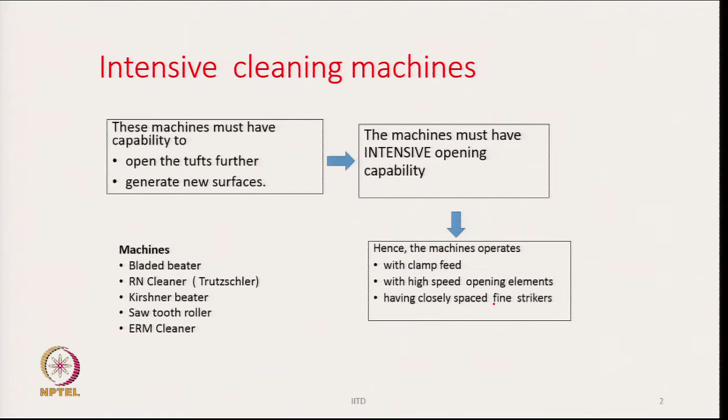So, these are the common features of all these machines, and the name of the machines are listed. If you look at these names, there are quite a few machines which fall in this category. These are the commercial names of the machines, like RN cleaners, sawtooth rollers, or ERM cleaners. We will discuss some of these machines now.

The general construction features of these machines are that there is a cylindrical chamber as shown in this diagram, which will house the cleaning equipment. The top part is covered by a plate, and the bottom part of the machine holds a series of grid bars or maybe a perforated or slotted sheet, as the case may be. So, it is a cylindrical chamber which is going to house the cleaning equipment, whatever is the form of it, and the bottom part is having either grid bars or a perforated or slotted sheet.

The space below the grid bars is enclosed from all sides to create a dead air chamber for the collection of trash particles which will settle here. So, the trash particles will fall down and will settle below the grid bars.

The beater is mounted centrally on side stands. There is a tuft entry, like here it is shown on the left hand side, and there has to be a tuft exit also. So, this is the typical constructional feature of the machine.

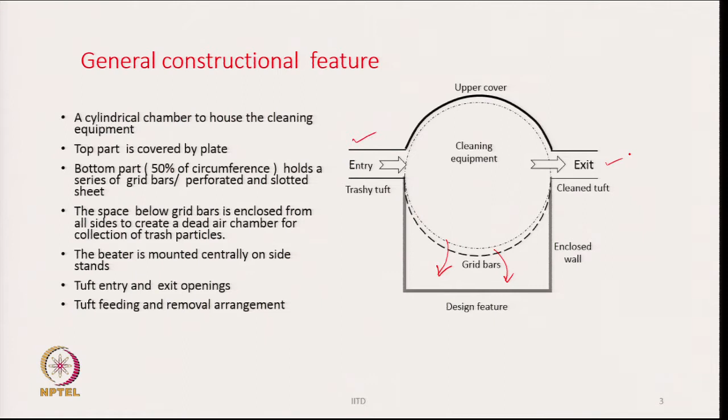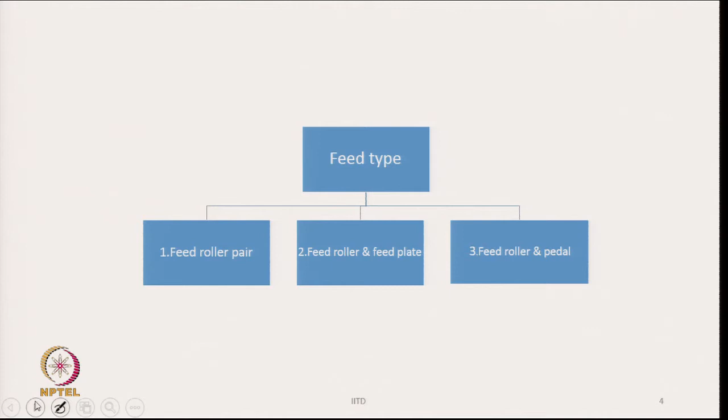Now, the most important part of this category of machines is the type of feed, that is, how do we feed the tufts. There are three types which is normally followed by the machine manufacturers. One is feed roller pair, that we use a pair of feed rollers, or we use a feed roller and a feed plate, or the third one is a feed roller and pedal, sometimes known as pedal and pedal roller also.

So, these three types are there. I will try to understand what are the differences between these three types, and a little description about the three types of feeding devices which are used. So, the first one is a pair of feed rollers. Now, this pair of feed rollers, as shown in the diagram, consists of a conveyor followed by a pair of fluted rollers.

So, this is the conveyor here, and these two are the feed rollers. So, a conveyor carries the tufts and feeds the tuft in between the two feed rollers that we have. The forwarding motion of the feed roller is best, since both the top and the bottom rollers rotate.

Therefore, both the rollers are positively driven and hence they can guide the tufts in an easy manner. The clamping distance is maximum, that is a disadvantage.

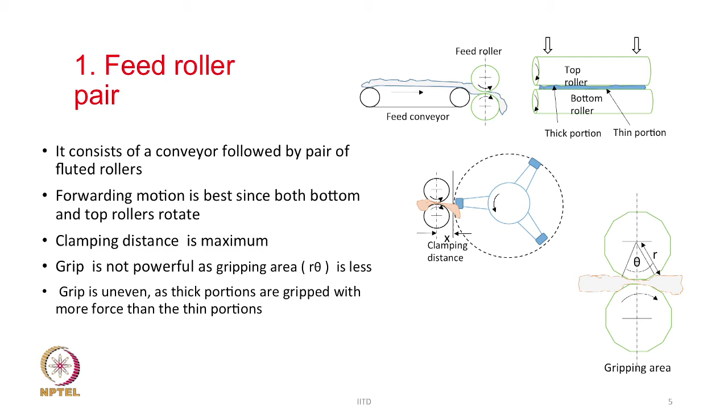The sheet being fed is basically an agglomerate of tufts in the form of a sheet which we are feeding to the machine. So there could be some unevenness across the sheet, and if the unevenness is there, then the thicker region will be experiencing more force when gripped between the two rollers, whereas the thinner regions will experience less force.

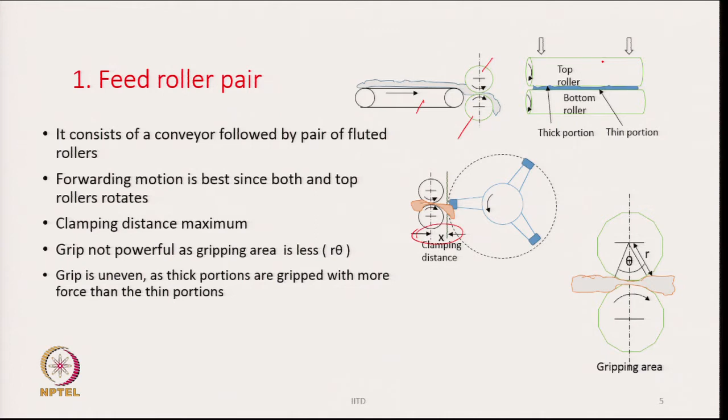So when this cross section is acted on by a beater, what happens? From the thin regions the tufts will be able to slip. There is a possibility of slippage of tufts from thin regions, and therefore these tufts may not be opened properly, whereas the tufts in the thick regions, because they are more powerfully gripped, will receive the blow from the beater blades and they will open out.

So as far as the thick region is concerned, there is no problem, but in the thin regions there is a chance of slippage of the tufts, and therefore they may not be opened properly. And if we can't open them properly, the cleaning ability of the machine will go down.

From there we move to the next type of feed arrangement, which consists of a feed plate and feed roller combination. So there is a plate and a roller, but this time there is a single roller only. The feed plate is a stationary plate only. So look at the cross section of the plate as shown in the lower diagram.

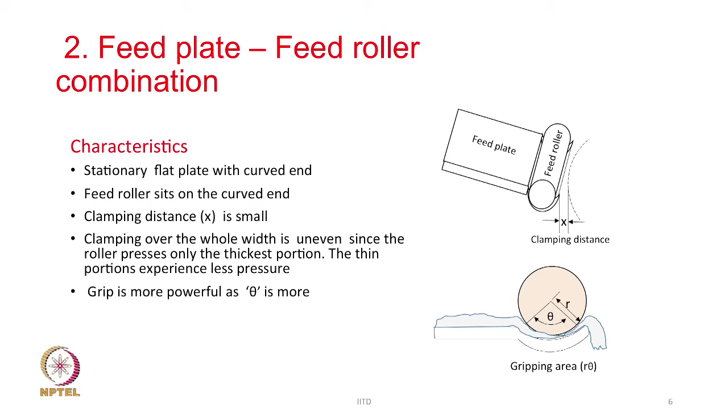From there we go to the third type of feed arrangement, where there is a pedal and a pedal roller. This is a little different from the previous one. It is like if we take the feed plate and slice it into many parts, then we get this kind of arrangement. We call it pedal and pedal roller.

Each pedal, shown in the top diagram, is basically a lever with a long tail and a fulcrum. So it is a kind of lever with a fulcrum.

The tail end of the pedals are connected to a spring, or sometimes dead weights can be hung from the tail part of these pedal levers. The forward end has a curvature matching the curvature of the feed roller, and the feed roller will sit on it.

There is a little gap maintained between this pedal and the pedal roller, because we have to accommodate the sheet of tufts there. The mat of fibers in between the pedal and the pedal roller remains under pressure, because the roller is also under pressure.

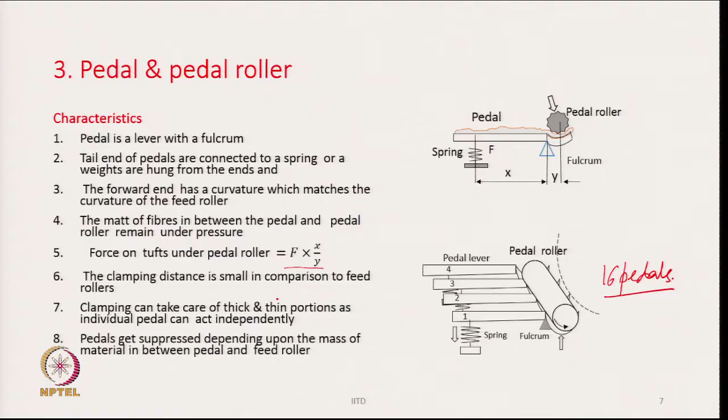How much the pedals will be depressed all depends upon the mass of material or thickness of material in between the pedal and the pedal roller. So these are the three different types of feed arrangement for the intensive cleaning units that we use.

If we compare the three different types of feed, in the case of two interacting clamping rollers, the forwarding motion is best, because both rollers are rotating and positively driven. Clamping distance is maximum, which is a disadvantage, and grip is not powerful, which is also a disadvantage for this type of device.

For feed roller and feed plate, forwarding motion is only by one roller. The plate is stationary, so forwarding motion is not so good. Clamping distance can be reduced, which is an advantage, but clamping over the whole width is poor, since the roller pressures only the thickest part and the thin part does not receive much pressure.

The grip is more powerful due to being spread over a curved surface or region, hence the grip is better. For feed roller and pedals, forwarding motion is by only one roller, so forwarding motion is not so good. Here also the pedals are stationary, they do not move. Clamping distance is minimum, and clamping can take care of thick and thin portions, which is an advantage over the feed roller and feed plate arrangement.

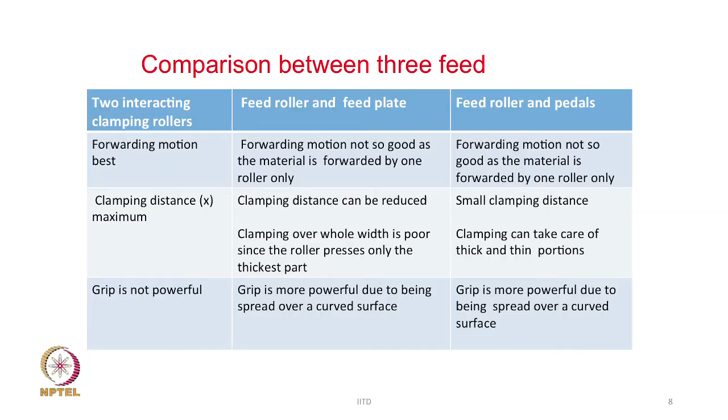There is a central shaft at the center point, with three projecting out arms at 120 degrees to each other. At the top of the arm, steel blades are fixed.

At the top of the arm, steel blades are fixed, because these blades will be coming into contact with the tufts, so they have to be very strong. The tufts are fed by a feed lattice to the beater chamber. There is a compression roller, and the sheet is being fed by a pair of feed rollers.

So, I am feeding this to the chamber where the beater exists, and the beater rotates at a certain speed. The tufts, as they are fed, the blades will impart a very strong blow on the tufts held by the feed roller pair. So, material is being fed continuously, and the beater blades are coming towards it and imparting a very strong blow on them.

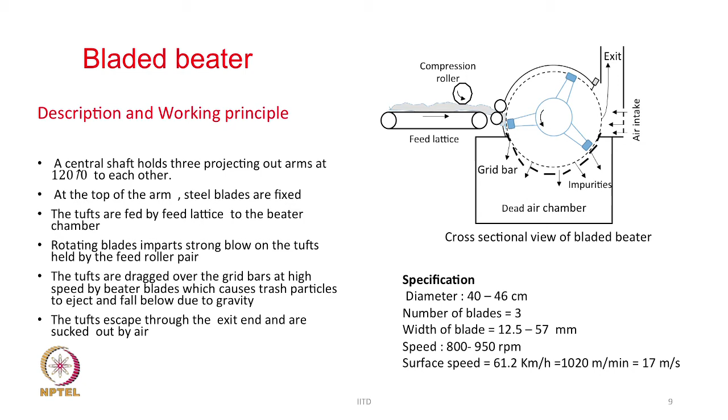So, this is how the bladed beater is going to act, and similar types of designs are there, where within the chamber, if the beater is replaced by another type of beater, then it will also be a very intensive cleaning unit. That is what has been done by the machine manufacturer. The overall structure remains the same; we just change the design of the beating blades.

All right. So, let us go from here to some detailed specifications of the machine given here. These are typical values; it may vary from manufacturer to manufacturer, but just to give you some idea, I have given you some typical values.

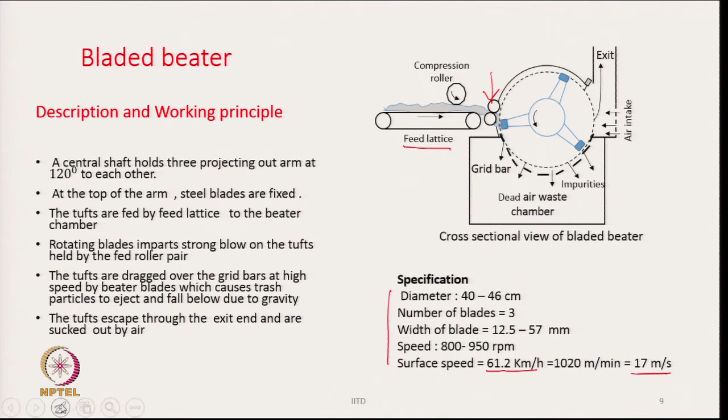The feed rate is changed to alter the intensity of the beating action. So, if I change the feed rate, the distance between these lines can be made shorter or longer. That way the intensity can be changed by changing the feed rate, or by keeping the feed rate constant and changing the speed of the beater instead, which will also change the intensity of the opening action. So both ways it can be changed. Changing the feed rate will affect the productivity, which we have to keep in mind.

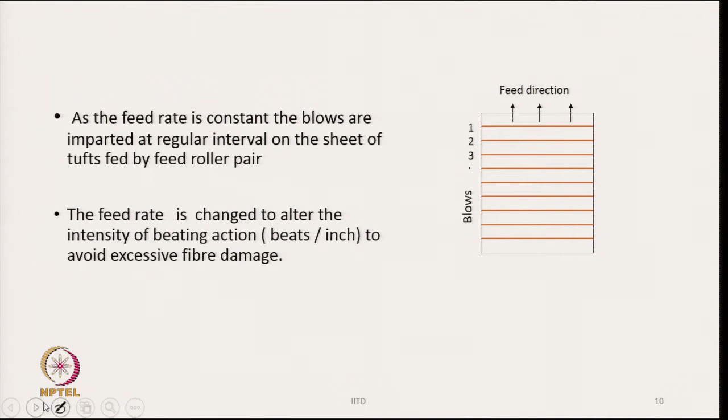So, with this we now go to another important aspect of the beater. We need to discuss it a little more thoroughly: the grid bars that we have seen below the machine. What we have seen is that the bottom part of the machine will always have some kind of grid bars, under casing, or some kind of blades. Different machine manufacturers have different types of designs, and different combinations are possible. The grid bars are basically polygonal bars, or they could be blades as elements with edges.

Or it could be a perforated and slotted sheet. Different types of designs have been made by different machine manufacturers, and they are used in different locations. Now, the grid bar normally covers at least 1/4 to sometimes 3/4 of the machine. So, we have seen that in the case of the step cleaner, around 25% of the circumference is covered by grid bars.

Some machines can have up to 50% coverage by the grid bars, some machines up to 75%. So different designs have different extents of cover by the grid bars.

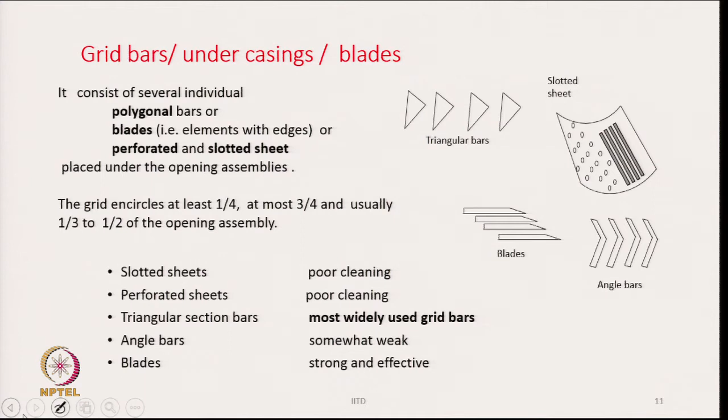Now, with slotted sheets, the cleaning is relatively poor. Aggressiveness on the tufts is less in comparison to triangular bars. Perforated sheets also give poor cleaning.

Triangular section bars are mostly used. Grid bars are these triangular bars. They are quite aggressive on the tufts, and we can change this aggressiveness by adjusting the exact position of the triangular bars with respect to the line of action of the beater. We can change the angle, making the triangular bars very aggressive on the tufts, or less aggressive, as the case may be.

The angle bars are somewhat weak, and the blades are very strong and effective. In some cases we use the blades also. In some type of design we simply use blades followed by a suction. Anyway, so these are the different types of grid bars, under casing or blades which are used.

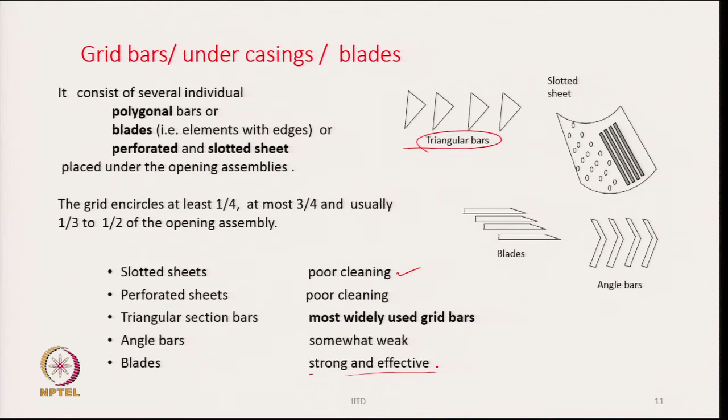Now we need to discuss the effect of grid bars. The grid bars have a major influence on the cleaning effect. Their job is mainly to clean, they cannot open the tufts. Their job is to clean the tufts, because the tufts will be hurled over the grid bars, and the kind of action the tufts or trash particles receive depends upon the geometry of the grid bars and the way they are positioned.

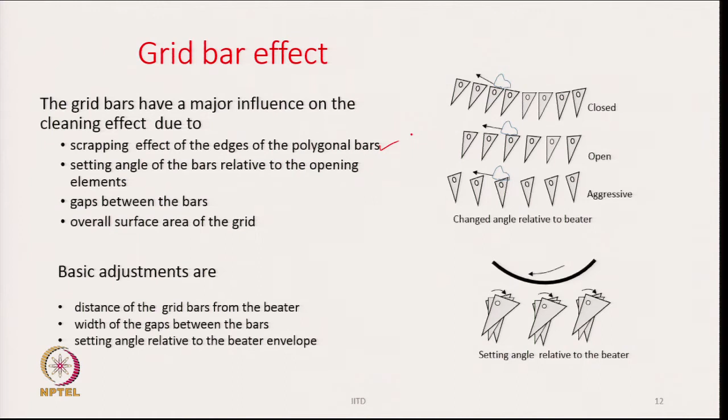So the cleaning effect is affected by the scraping effect of the edges of the polygonal bar. The edges of this polygonal bar have a scraping effect that depends upon them. The setting angle of the bar relative to the opening elements also can affect the degree of cleaning action. The gaps between the bars will also affect the extent of cleaning and waste generation, and the overall surface area of the grids, that is the surface area of the machine covered by these grid bars. So in many ways these bars will affect the cleaning potential of the machine.

Basic adjustments are distance of the grid bars from the beater. That is the first important setting, the distance of the grid bars from the line of action of the beater blades. Width of the gaps between the bars: more opening means more trash, but more loss of fibers as well. Less opening means less trash, but less waste as well. Setting angle relative to the beater envelope will decide the aggressiveness of the edges of the grid bars. So these are the typical adjustment areas of the grid bars.

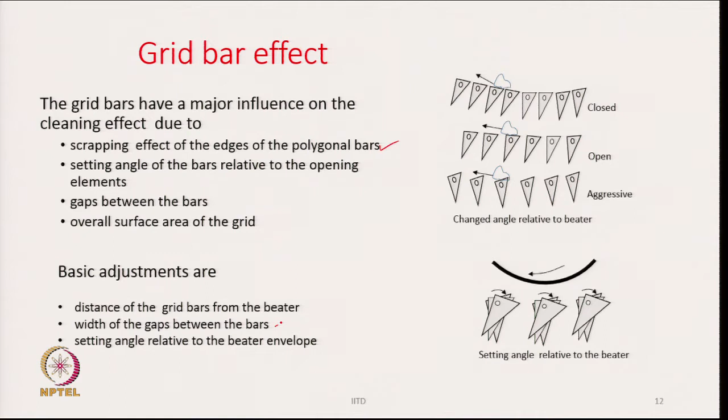With that, we have discussed the bladed beater part, the role of grid bars, the construction features of the beater, and the type of feed and their relative advantages and disadvantages. Now we are coming to another type of beater known as the Kirshner beater.

As I said, the construction features are more or less similar. The only difference is that in the beater chamber, the 3-bladed beater is now displaced by another beater with 3 arms. But now, the blade top surface is filled with rows of needles as shown here. So it is no more a rectangular strong bar, but now we have pins or spikes on it. That is the difference.

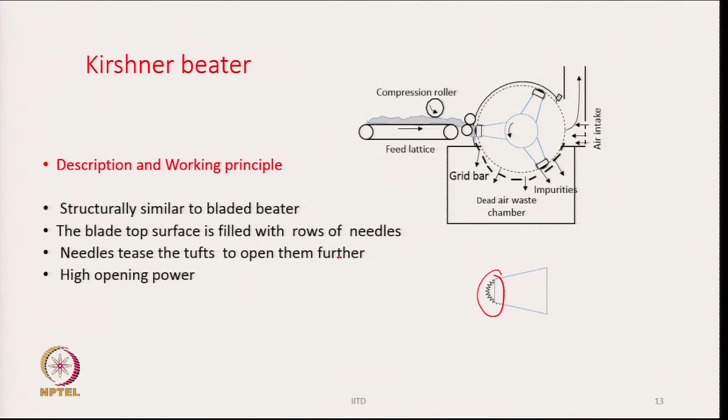And what is the advantage we get out of it? Because these needles or pins can tease the tufts, we are able to open them further. When the tuft size has reduced a lot, the bladed beater will not be able to open them further. So we need a very aggressive action on the tuft now, but that aggressive action does not mean that having a similar type of bladed beater and running it at higher speed is going to be effective.

To open the tufts further, we have to tease them out. So we have to have a means through which we can really tease the tufts with the help of needles. This beater has needles on the surface of the blade, and therefore it can open the tufts further. So it has a very high opening ability in comparison to the bladed beater. The rest remains the same, it also runs at quite high speed.

After teasing, the tufts will be thrown against the grid bars at high speed. So a lot of particles which are liberated because of this teasing action will be thrown due to very high centrifugal force, and many of them will pass through the openings of the grid bars.

So, the cleaning mechanism is exactly the same. We are feeding in a very similar manner, and we remove the tuft from the machine also with the help of pneumatic means.

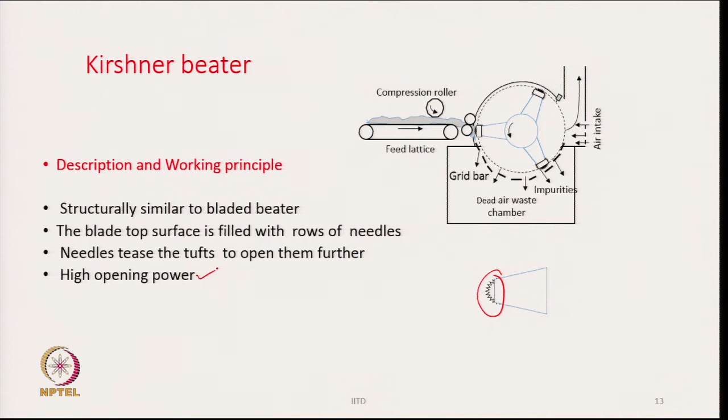The other type of cleaner is known as an air jet cleaner. The name itself implies that we take the help of a jet of air to clean. This particular cleaner has no opening ability because there is no opening device. It can only clean, meaning this machine must follow a machine where we have already opened the tufts and generated or liberated a lot of trash particles. That is what is important, but let us look at the design feature of the machine.

The diagram is shown. There is a tapering duct with a certain turn or bend. You see this is the duct as shown here, and it is gradually tapering, and then there is a sudden bend, more than 90 degrees. Then there exists a separation edge near the bend, as shown here.

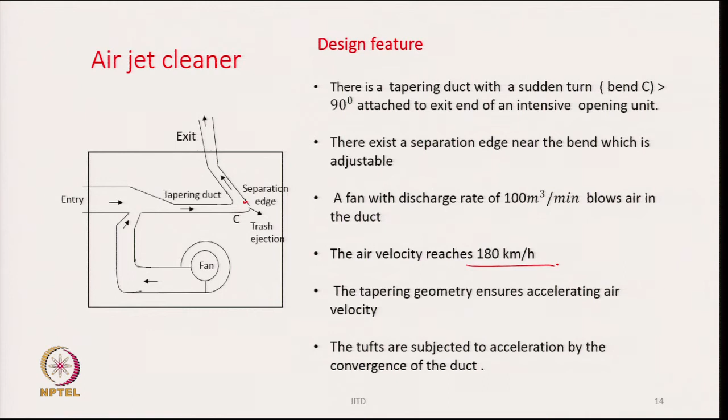By the time they reach point C, there is a sudden turn. And what happens because of this? We will now see this in the diagram.

The trash particles, we all know, are generally heavier than the flocks. Trash particles, density wise, are much heavier. Their density is more than the density of the flocks. Flocks are basically agglomerates of fibers. Now, cotton tufts have less momentum than the trash particles.

This is what is going to happen. So, cotton will move at the speed of air. At the bend C, the centrifugal force experienced by a tuft or trash is given by the formula Cf equal to m v square by r. That is the type of force which will be acting on them.

The specific volume of tufts being greater than the trash particles, tufts will follow the bend and move along with the air. So, tufts can easily follow the bend as shown in the diagram, because their specific volume is more. The specific volume is volume per unit weight. Per unit weight, the volume of the tufts is more, but per unit weight, the volume of the trash is less.

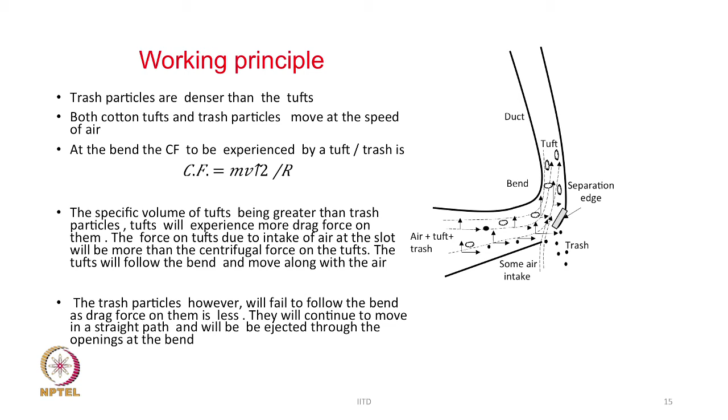So, in the duct, air plus tuft plus trash, all of them are moving together. The tuft will be able to follow the bend, whereas the trash particles will not be able to do it, and therefore, they will escape through this opening, and then we have a collecting system over here, where the trash particle will be collected. So, this is how you can also separate out the trash particles from the tufts.

Now we go to another type of design which is most recent, and we will discuss about them. These are known as cleaners with multiple Licker-in type rollers.

Now what is Licker-in? You will learn about them when you go through the carding machine, as we have such kind of device there. Licker-in is basically a roller with saw type teeth on its surface, like a cylinder or drum whose surface is filled with large numbers of teeth designed like a saw. So they are known as Licker-in, and hence we say these are cleaners with Licker-in type rollers.

These consist of a feed lattice shown in the diagram, and 3 to 4 cylinders filled with needles, sawtooth and pin type teeth arranged in a line. In this diagram we show you 3 cylinders, but we can have at the most 4. So it is a series of cylinders working one after the other, having sawtooth or needles or pins on their surface, all working together.

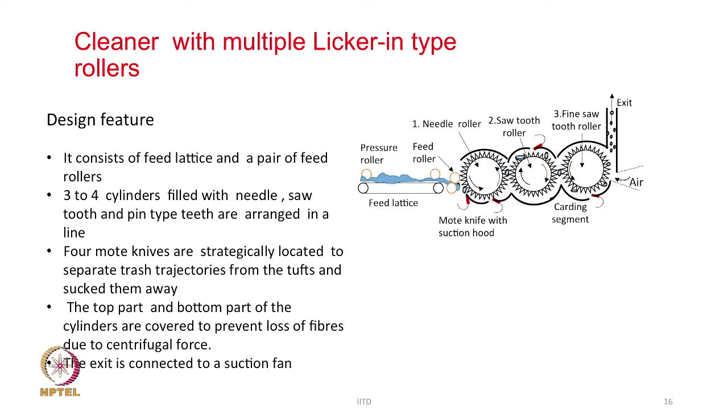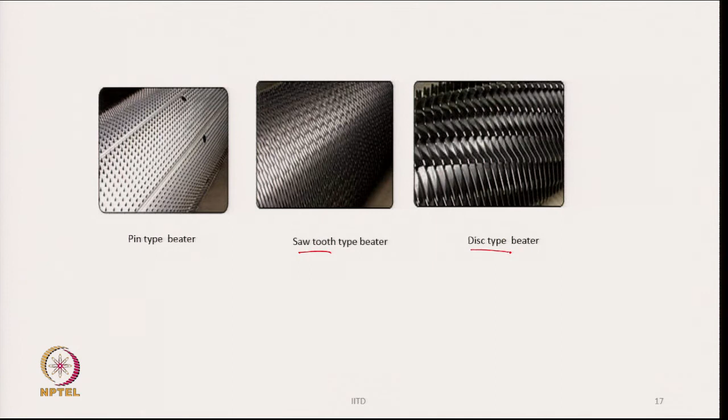The typical roller surfaces are shown here. You see pin type of surface, the sawtooth type of beater, and a beater with disc type of teeth on it. So different types of designs are there: pins, sawtooth, disc type, depending upon the nature and opening ability and kind of cleaning that we need. We can choose the type of beater or roller that we need in a given situation.

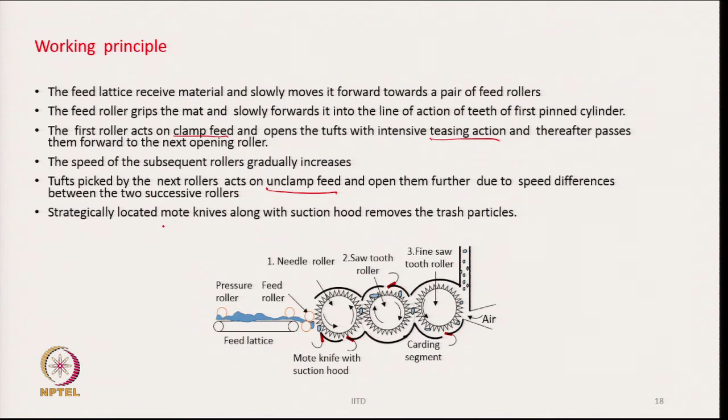Tufts picked up by the next roller act on unclamped feed and open them further. So that is what I just said, that the opening is mild in nature, because the tufts are not really clamped between two rollers. The mote knives, which are strategically located along with the suction hood, remove the trash particles. This is how the system works, and it is quite efficient and effective, and becoming popular.

In all these modern machines nowadays, they are all connected. There is a screen, basically an operator interface, so that it becomes quite easy for the operator to change the opening ability or cleaning potential of the machine. It is no more that we need to change the motor pulley or machine pulley to change the speed. Today, the most modern machines have this system where there is an operator interface, and with the help of this interface we can easily change the cleanability of the machine and adjust the beater speed.

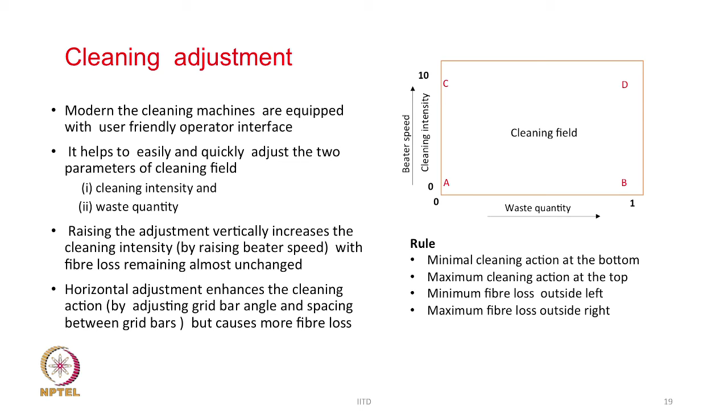Fiber loss may be more, so one has to choose the right combination of waste quantity and cleaning intensity depending upon the kind of cleaning required to satisfy the quality of the final yarn and the amount of waste one is ready to accept. Based on this, the cleaning field is adjusted.

We will discuss now other equipment in the blow room line: metal separator, dust extractor, fire eliminator, and elimination of contaminants. These are also part of the blow room line. Other than cleaning machines, we will also learn about mixing machines, which we have not yet learned. These are also there in the blow room line.

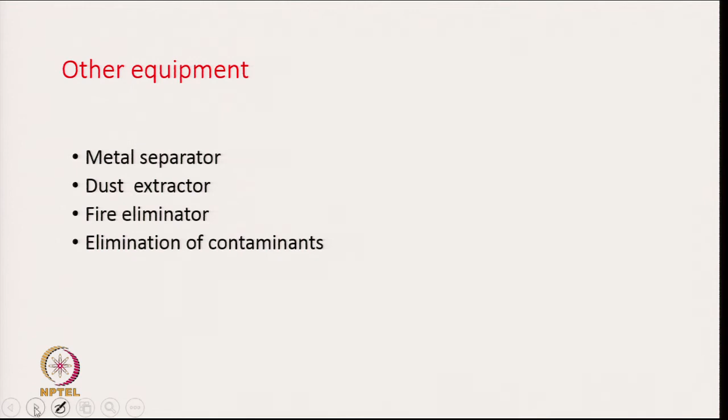Metal extractors: the cotton may contain some nails or pieces of wire, and these metallic parts are very dangerous for the machines. They will damage the machines. So, we must have a metal extractor in the line, so that these metal pieces can be detected and eliminated.

One type of metal extractor works on the principle of magnetic force, because magnets can attract ferrous particles. In the duct there is a knee bend attached to it. Through the ducts, cotton fibers or tufts always flow from one machine to another. So we introduce a bend, which consists of two magnets placed strategically.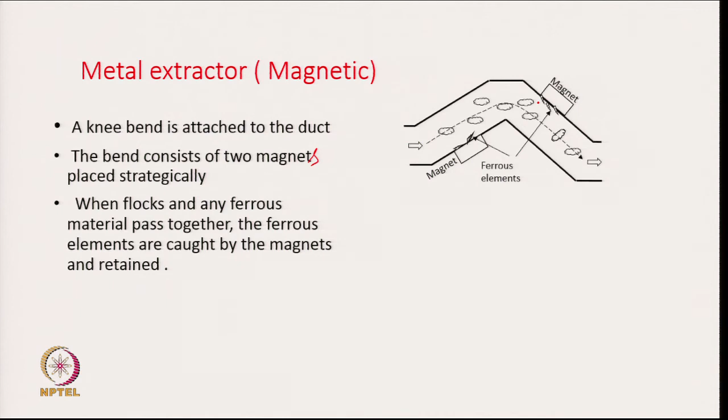This is how the metallic pieces are actually taken out with the help of these magnets. The magnet holds them and retains them, it does not leave them. So from time to time, you have to go and watch and remove the metal pieces.

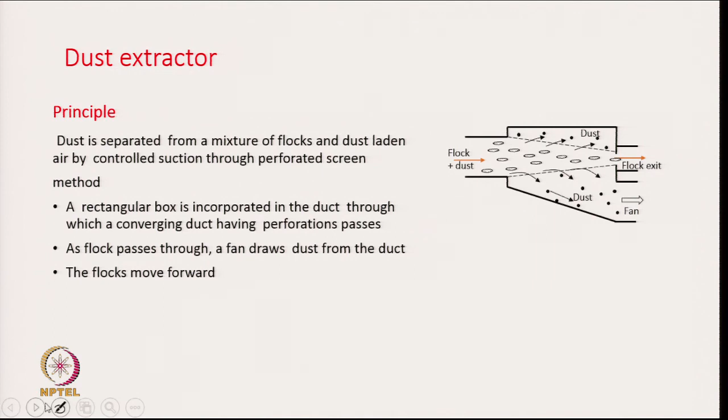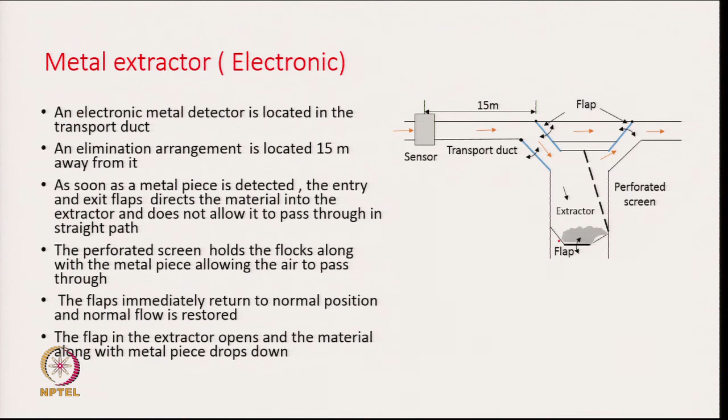The other important thing for us is the dust extractor. Dust is eliminated by many machines, and wherever there is a condenser cage, a lot of dust is being removed through those cages. But there are some machines specifically designed to remove dust, because in certain technologies dust creates a lot of problems, especially in rotor spinning, vortex spinning, air jet spinning, or friction spinning.

In all these machines, dust creates a serious problem. Even in compact spinning today, dust is a source of problem. In ring spinning it is not so much of an issue, but in other spinning systems the permissible amount of dust is much less, so we have to be more careful about eliminating dust there. So dust extractors are there, and how do you remove dust?

The principle is that dust is separated from a mixture of flocks and dust-laden air by controlled suction. That is the only way we can remove dust from a mixture of dust and fibers.

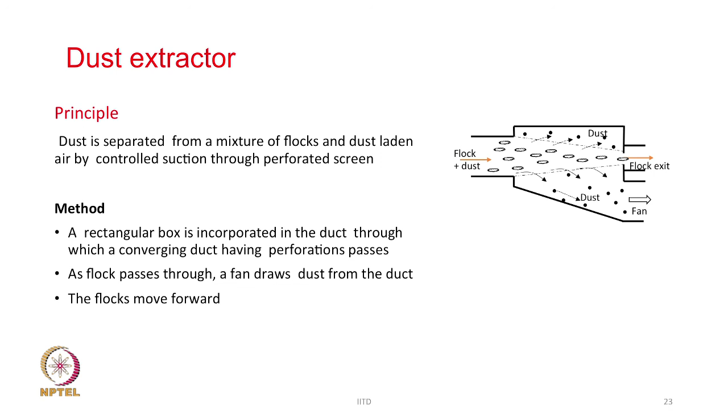This is how dust can be extracted in other machines too; wherever there is a dust extractor, the principle is the same. We have to create a large surface area through which there is controlled suction, able to take out the dust-laden air, but it should not cause the flocks to come and remain stuck to the screen.

If the suction is too powerful, the tuft or flocks will remain attached to the screen, which is not what we want. So the suction has to be regulated or controlled so that it does not harm the tufts, allowing them to pass through while removing the dust-laden air. That is how these dust extractors work.

The other device in the line is the fire eliminator. Cotton can catch fire because fibers are very inflammable. In the blow room line there are incidents of fire, because metal parts sometimes hit metallic surfaces, generating sparks that can lead to fire. So fire eliminating devices are also there.

It consists of a spark detector and an eliminator fixed into a transport duct, as shown here in the diagram. There is a spark detector, which we can call a fire detector. If there is any smoke inside the duct, the spark detector will be able to detect it. As soon as it detects this, the eliminator reacts rapidly.

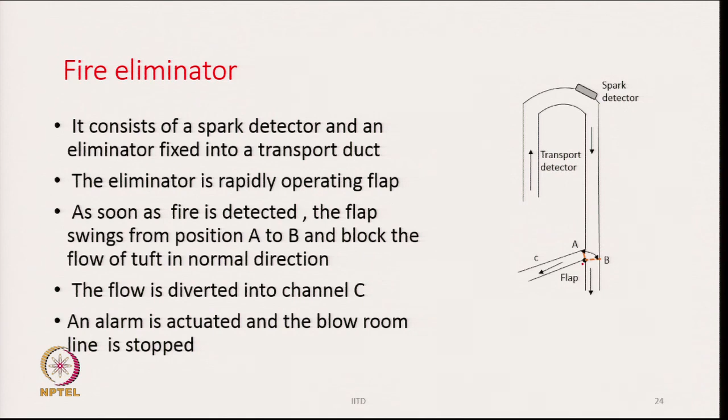There is an eliminator, basically a flap, as shown in the line diagram. This flap can swing and change the direction of movement of the flocks, diverting it. As soon as fire is detected, the flap swings from position A to position B. If it swings to B, the main line is stopped and the flocks are diverted towards the bypass line, moving towards C.

It will go to channel C, and at the same time an alarm is actuated so everybody knows, and the blow room line is also automatically stopped. That is how the fire eliminator works.

Once it detects smoke by any means or a fire within the duct, it immediately triggers a signal. The signal first operates the flap, which swings from position A to position B, diverting all incoming tufts to channel C, where they fall into an open area. At the same time, it stops the blow room line and gives an alarm signal. That is how the fire eliminator works.